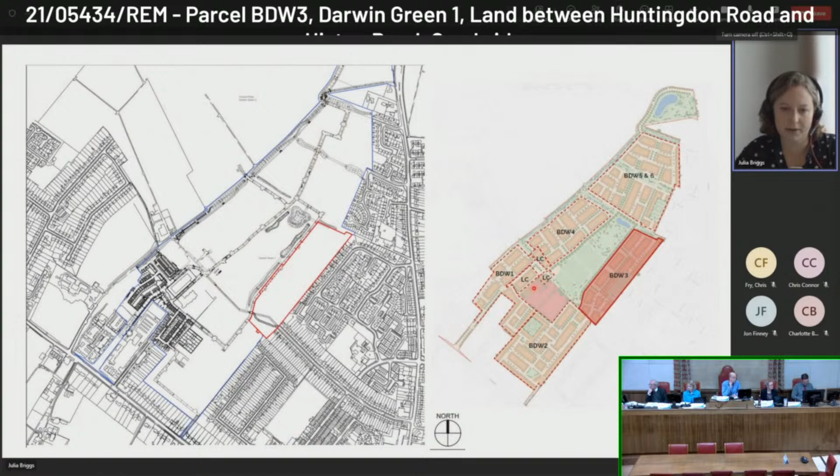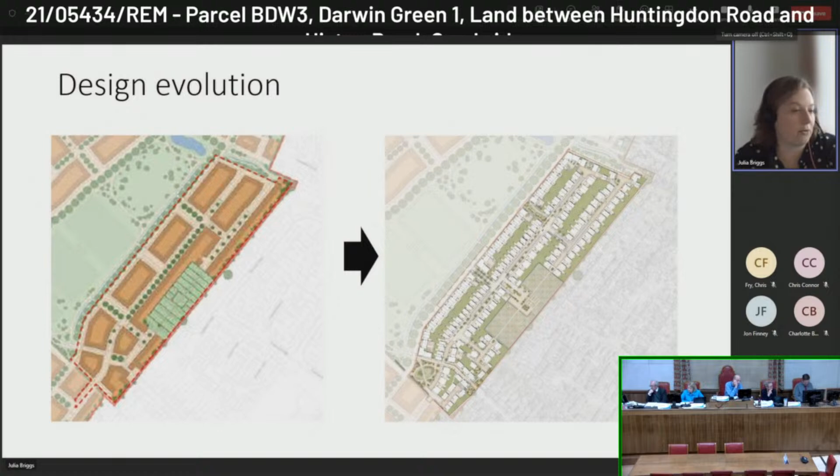This shows the site layout of BDW3, with the Central Park adjacent and existing neighbours also adjacent.

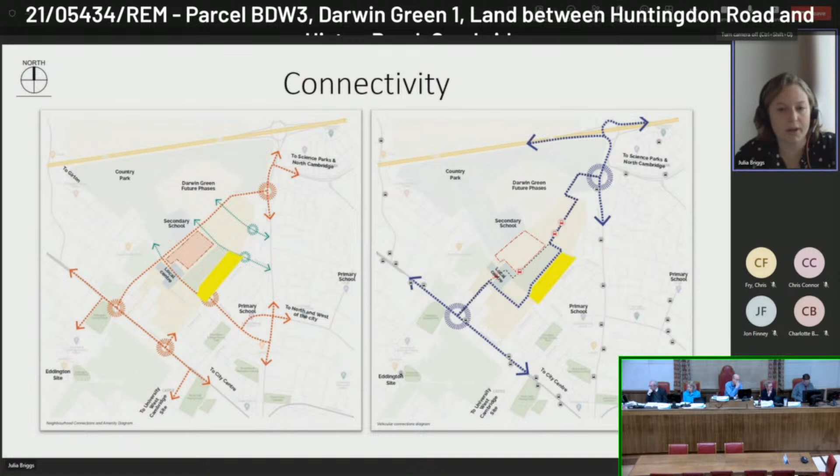Within the parcel, there are two vehicle accesses: one off the primary street, which feeds the majority of the parcel's secondary and tertiary streets, and in the south, one access through the BDW2 site, which feeds dwellings to the south of the orbital cycleway. So there is no through traffic for vehicles in this parcel, other than for emergency vehicles, which is supported.

Looking at pedestrian cycle links, this plan shows a number of pedestrian links throughout the parcel, showing good permeability to adjoining areas, and again access to that orbital cycleway in the south.

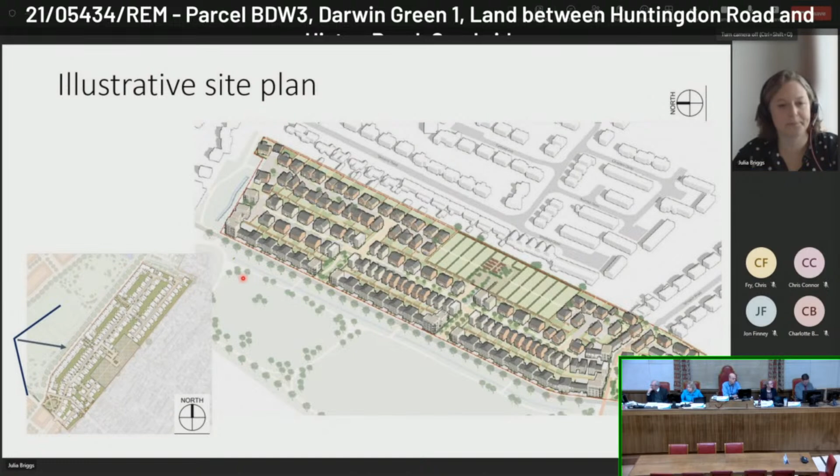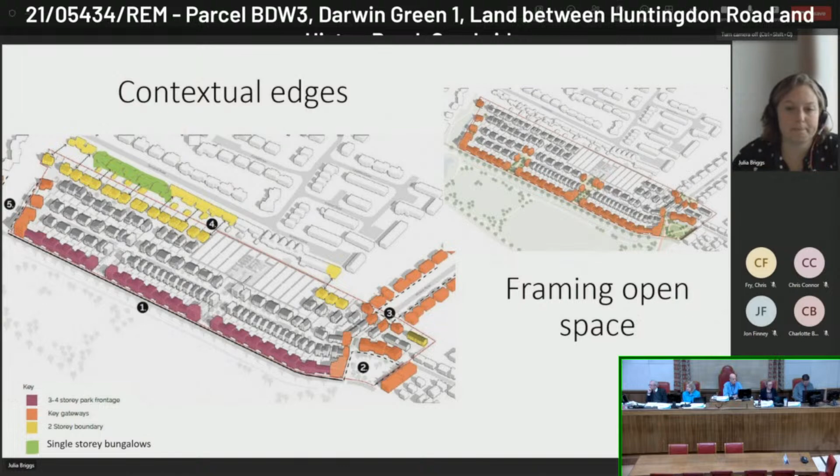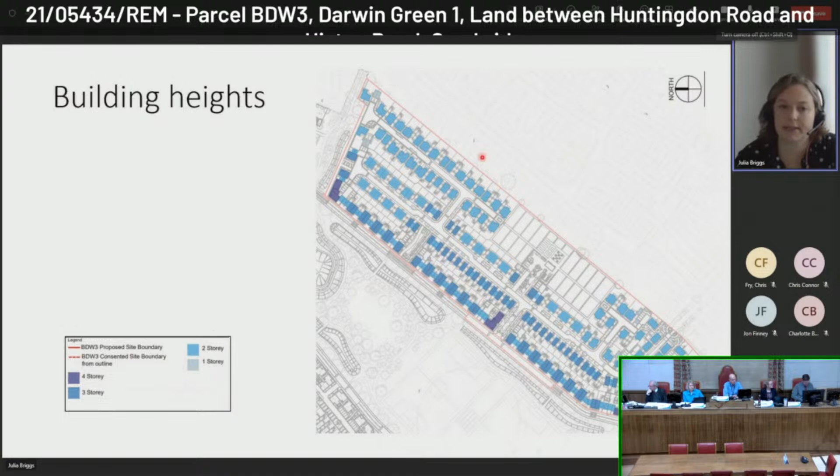The housing mix is shown here with the 3 apartment buildings, where my pointer is now on the corners of the site and on the corner of the vehicle access into the site. There are the walk-up blocks in purple, which also front key entrances on the Green Link and the entrance to the allotments and to Windsor Road. This image also shows the decrease in density of the housing as we move towards the existing neighbourhood.

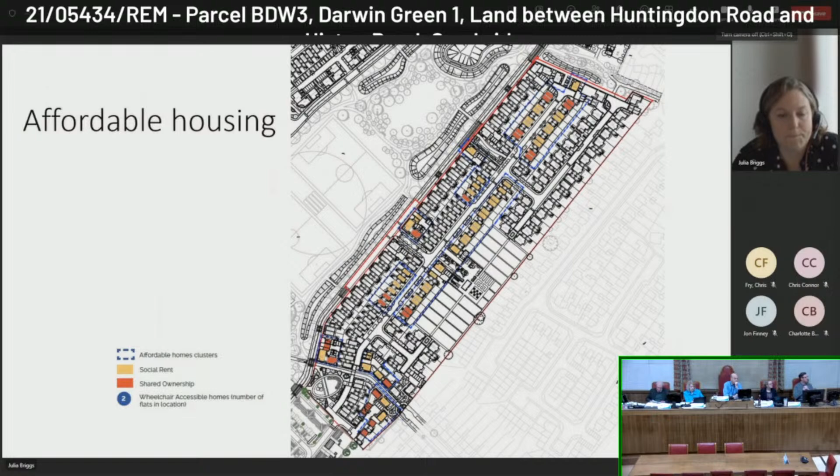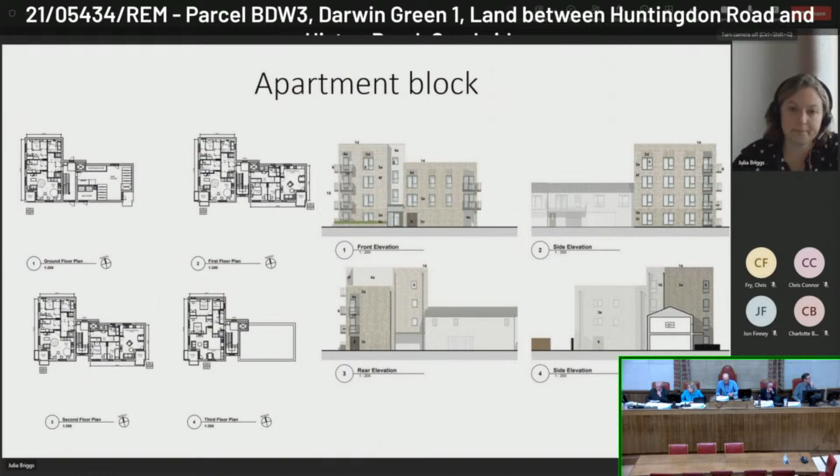So all dwellings in this parcel meet the internal nationally described space standards, including these apartments. This slide shows the park frontage houses, which have 3 and 2 story elements to them. Private external amenity space is provided here through rear gardens and also through front first floor terraces.

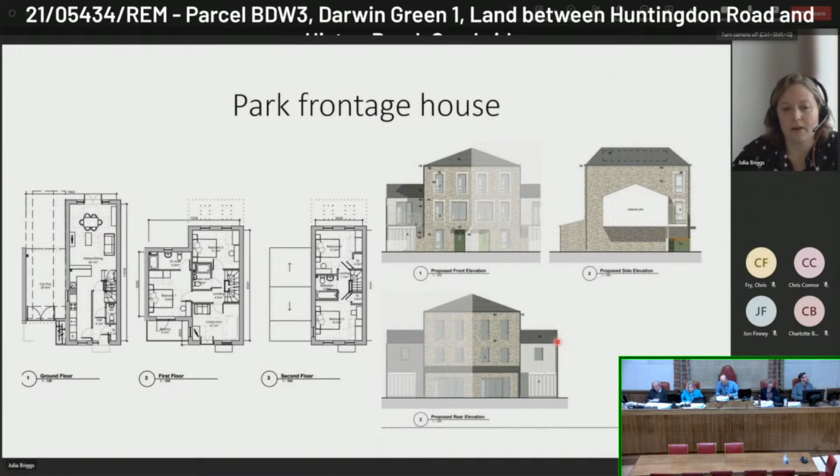There is also a duplex type, which is a 2-story walk-up. Again, each unit has their own access, with 1 unit on the ground floor and 1 unit on the first floor. Private amenity space is provided with patios or balconies, and some also have small gardens. Again, they meet the nationally described space standards.

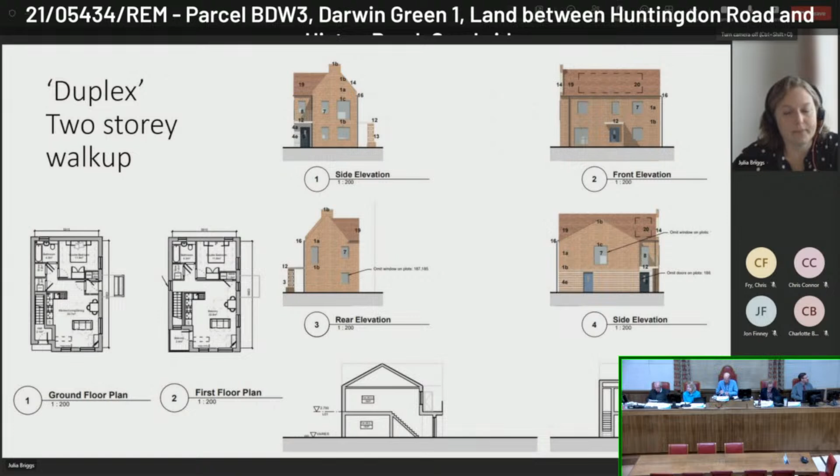Then we have a 4-bedroom detached house, and these units have generous rear gardens. They can be seen along the boundary with existing neighbours.

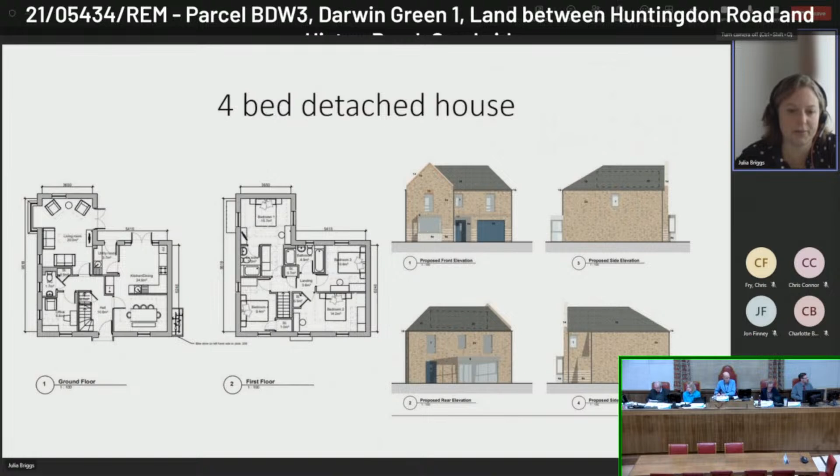There is also a flat over garage typology present on the mews street in the south and next to the apartment buildings on the park frontage. Again, private amenity space is provided by balconies to the front of these units.

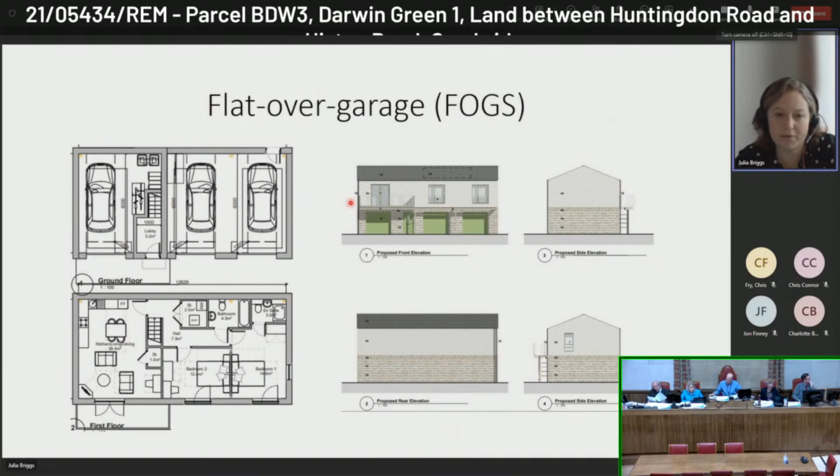Finally, the mews street in the south also contains 3 small 2-bedroom houses, specially designed with lower eaves in this area and private rear gardens, and these meet the space standards as well.

So coming on to some images of the layout and the houses on the scheme. This slide shows the park frontage. The primary street has a formal frontage as required by the design code, with the apartment blocks as marker buildings and with variation provided through the 3 and 2-story elements of those park frontage houses.

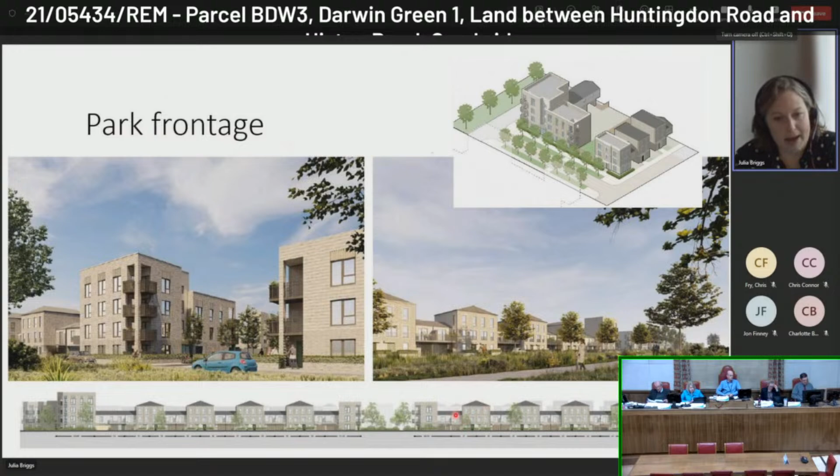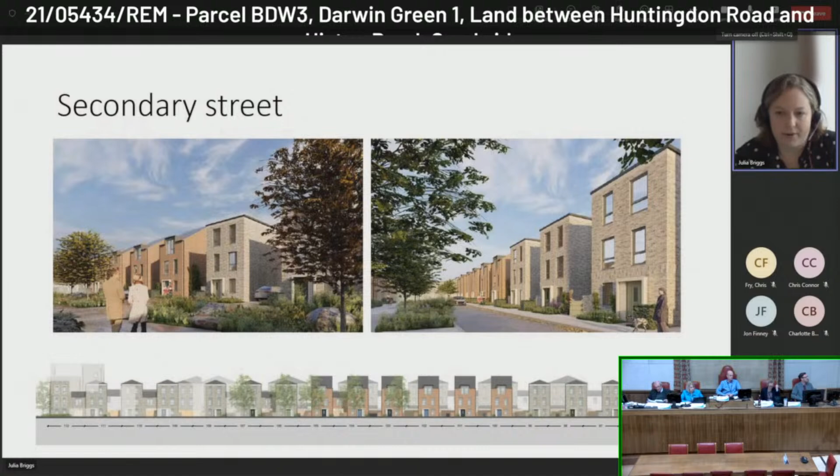The secondary street features detached 3-story housing. Going further through the secondary streets, you see 2-story houses with some 2 and 3-story walk-up blocks as marker buildings in this space.

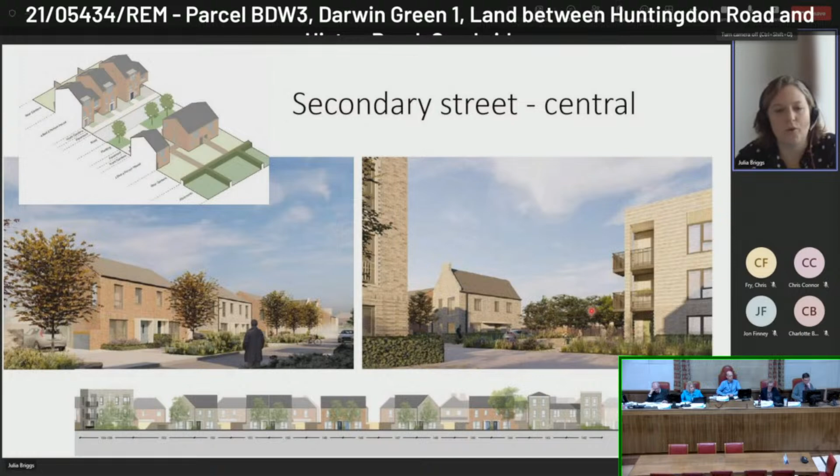On the right, the image here shows the entrance to the allotment parks with these marker buildings on the corner. In the tertiary streets...

there are a number of cul-de-sacs, and these feature detached two-storey houses, and they are shared surfaces and have close layouts, creating a sense of community in these areas.

Finally, this is the Tertiary Mews Street, located in the south of the parcel, and it has the smallest typologies due to its relationship with the neighbouring Windsor Road properties.

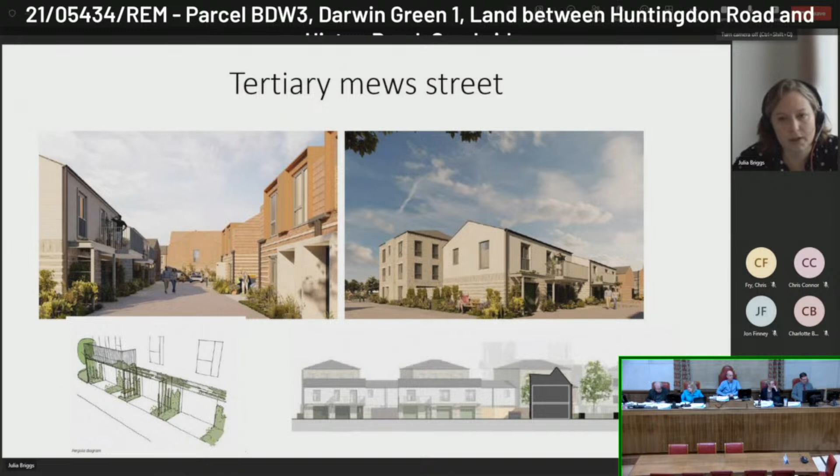So moving on, these site sections just show the gradual decrease in height from west to east, as the parcel in the west fronts the Central Park, and in the east fronts the existing neighbourhood of two-storey dwellings, and then the reverse taken from the northern boundary.

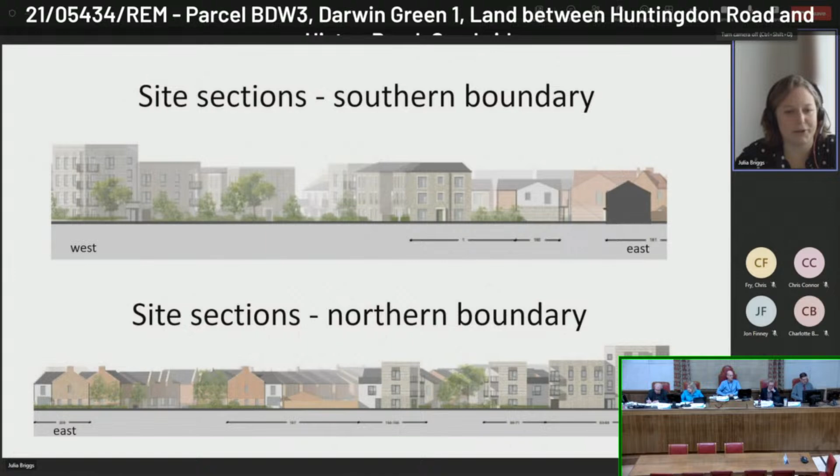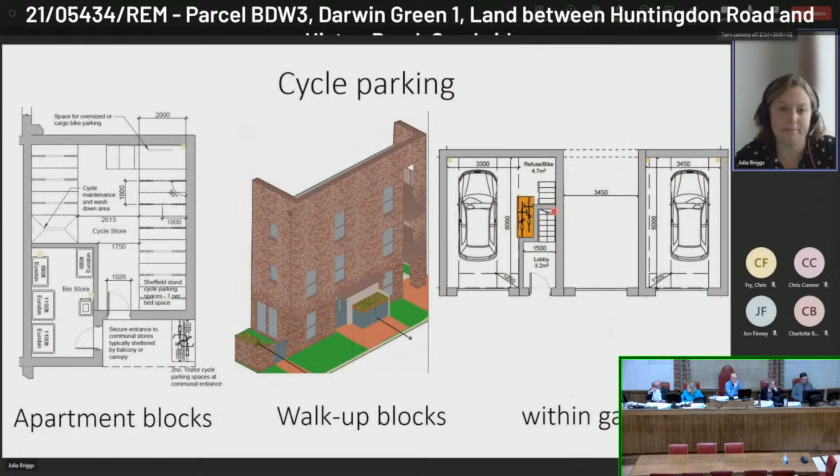Through the course of the application, cycle parking was greatly improved. The approach is the same that was secured on the BDW4 site. So we have apartments providing cycle parking on the ground floor with cargo bike space and also a maintenance area. In the walk-up blocks, cycle parking is provided near front doors, and within garages, cycle parking is provided to the side of car parking and meets the policy dimensions required.

All dwellings are dual aspect. There are lift accesses in all apartment blocks, and 94% of affordable homes meet M42, with the remaining 6% allowing for immediate occupation by a wheelchair user. There is also EV charging secured by condition.

The scheme provides a series of well-located and connected public open spaces. This slide shows where they are located throughout the parcel. So the allotments in the centre, there's a formal park in the south, the Windsor Road Park in the south also, play along the way spaces, an allotment arrival park, a pocket park replacing one of the original master plan vehicle accesses, and then two small parks in the north connecting to the green corridor there.

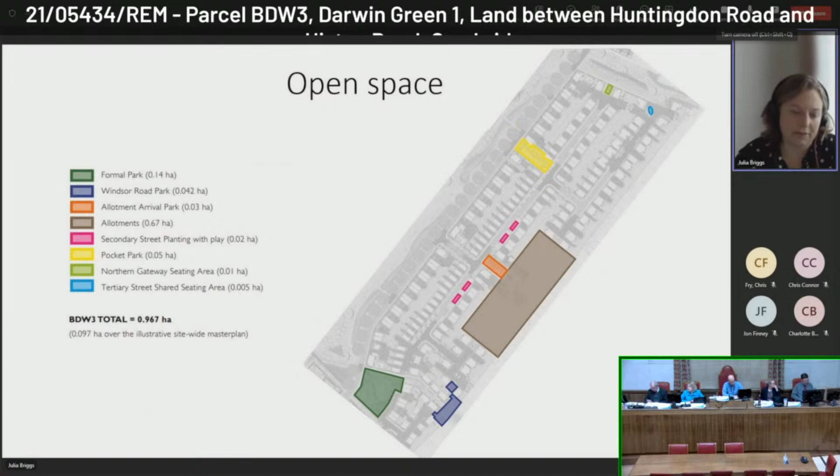In terms of play space, this image on the left shows BDW3 is ideally located adjacent to the Central Park, which provides a number of sport and recreation facilities, including football, cricket pitches, tennis courts, and a sports pavilion, and also a trim trail. There are also additional play spaces to the north and to the south of the parcel as well.

On the image on the right can be seen the 5 laps that have been provided within BDW3. The outline requires 3 laps to be provided and 5 have been provided, showing a good spread of play spaces throughout the site. Details of the play itself will be submitted to discharge outline condition 10.

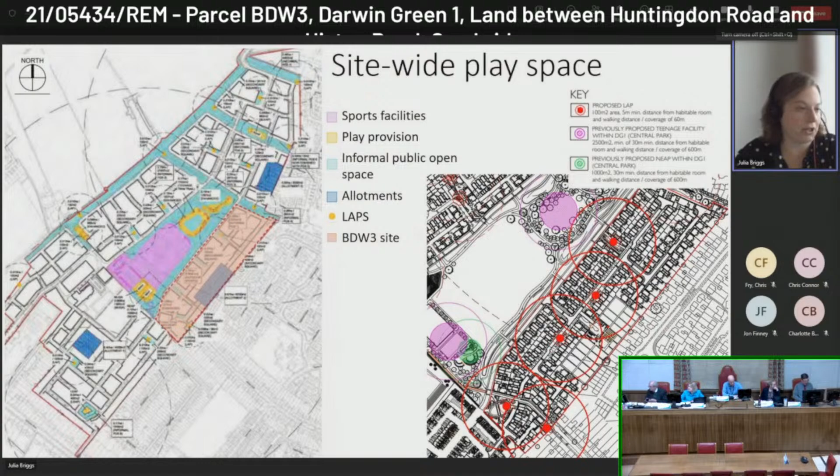Looking at blue and green infrastructure, a number of benefits have been provided here and assessed through green streets, through tree planting, through additional biodiversity features such as bee bricks and log piles and swift boxes, and through permeable paving and rain gardens as well.

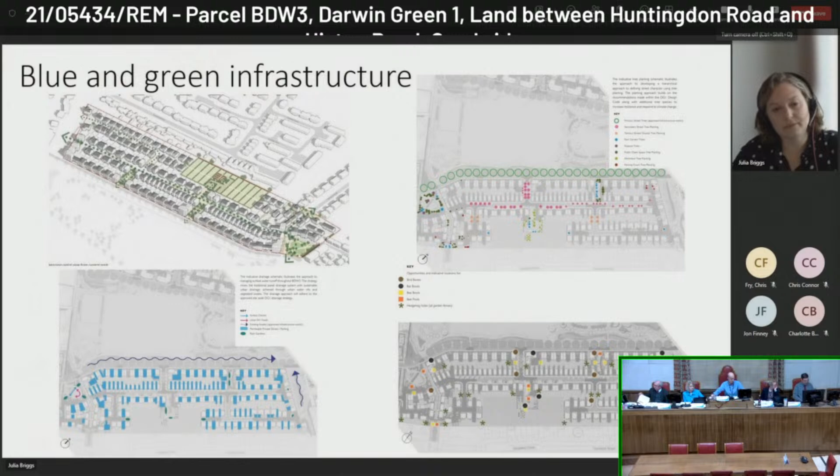This has resulted in a well thought out series of open spaces linked by green streets and with good permeability into surrounding areas. I'm just pointing out the formal park location and the Windsor Road Park location in the south, which I'll come to in some detail in a moment.

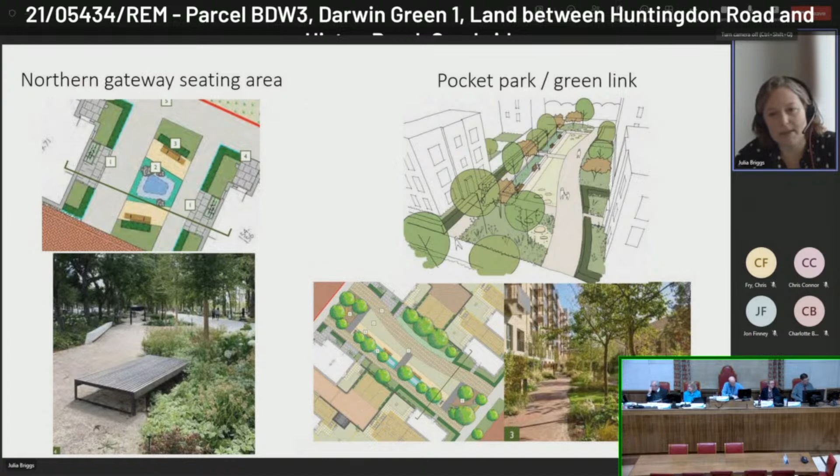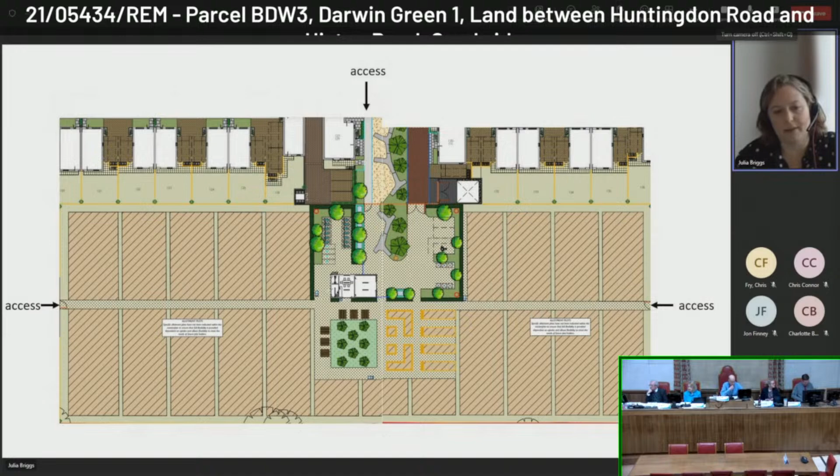As I said, there's two areas in the south, the formal park and Windsor Road Park, that have received some comments that I just want to run through now.

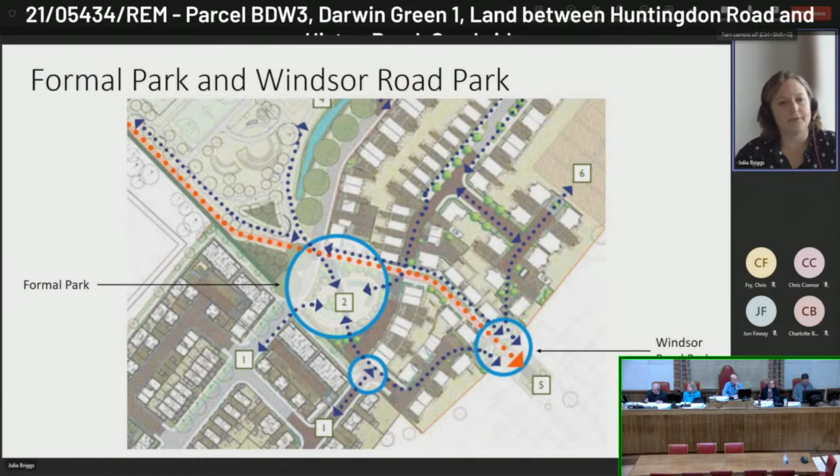Firstly, the formal park in the south, this is located in an ideal area and presents an arrival space at the entrance to the parcel. It's located at a meeting point of multiple paths from different directions. This image here shows some of those directions that people might be coming from, and it also shows the orbital cycle route separate in orange.

So questions have been raised about access into the site and the safety of the lap, which from the plan here you can see faintly outlined here.

Additionally, when the park was designed, there were some elements, the tree here that I'm circling and cycle parking over here, which were provided to act to slow people down through this pathway as well.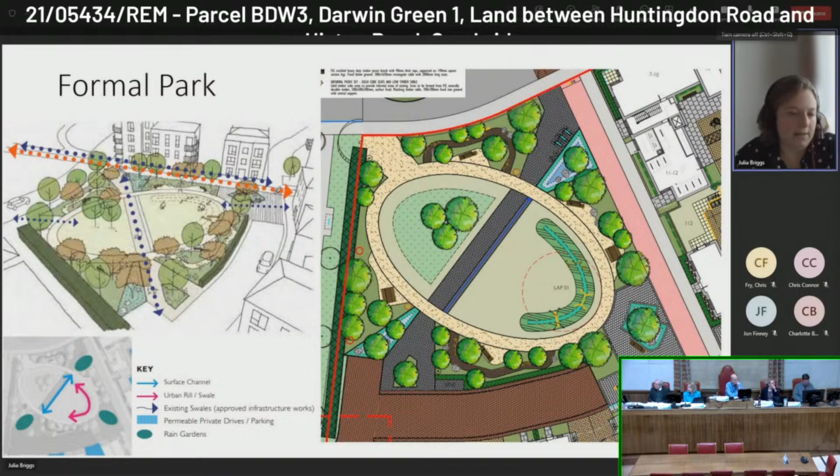So this park is supported. These are some images of what the features of this park may look like, noting particularly the surface channel.

Looking at the Windsor Road Park now, it's located at the entrance to Windsor Road, and it accommodates the orbital cycleway and pedestrian access as well, as you can see in pink and grey here. The design code requires a park in this junction for surveillance of this connection and to create an inviting entrance to the parcel.

This design also provides permeability into side streets, as you can see where my pointer is indicating now, and as this drawing on the left indicates with arrows.

As I said, comments have also been raised about the accesses through to the tertiary streets. These do provide permeability through to BDW2 and also the allotments.

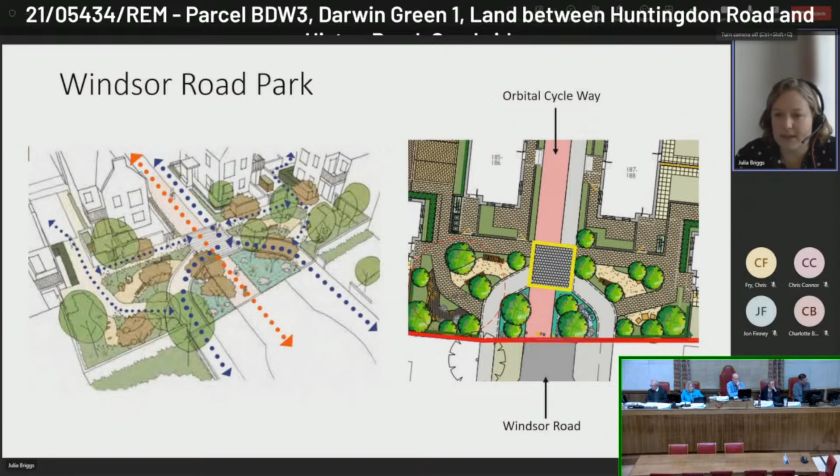Additionally, because the layout in this area is set around the Car-Free Orbital Cycleway to provide surveillance and an active frontage to the cycleway, the dwellings in this area have front elevations facing onto this parkway, and this creates a strong positive frontage to the park and overlooking. The trade-off is that services to these dwellings must be provided to the rear, and this has necessitated links for these residents.

I've added blue and orange arrows showing how residents will be using this area for putting out their bins, and also access to a communal bin store, which can just be seen off to the right here, and also access to their designated car parking spaces. This shows that these areas will receive a fair amount of activity and are required by the layout of this park.

In addition, this is the landscape or ground floor plan of the area, and these pink arrows indicate windows and doors that face onto these areas, providing good natural surveillance to them as well.

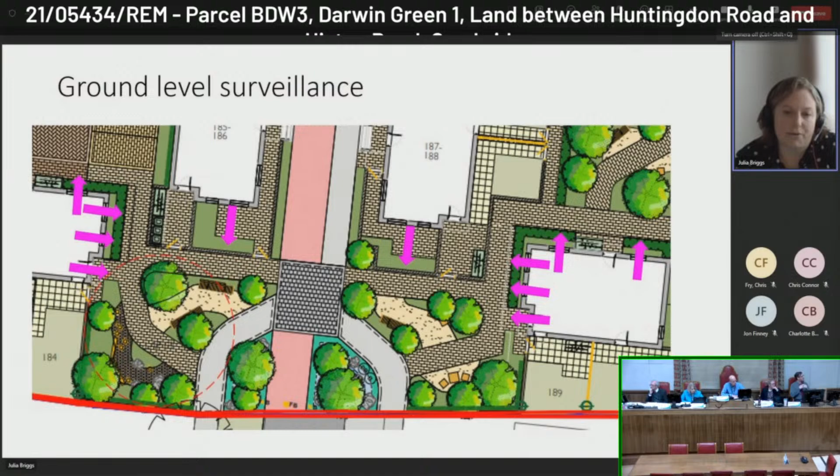I've included one further plan of the first floor layout, and this shows in pink a number of windows facing onto these areas, and also in blue arrows the balconies which overlook these areas as well.

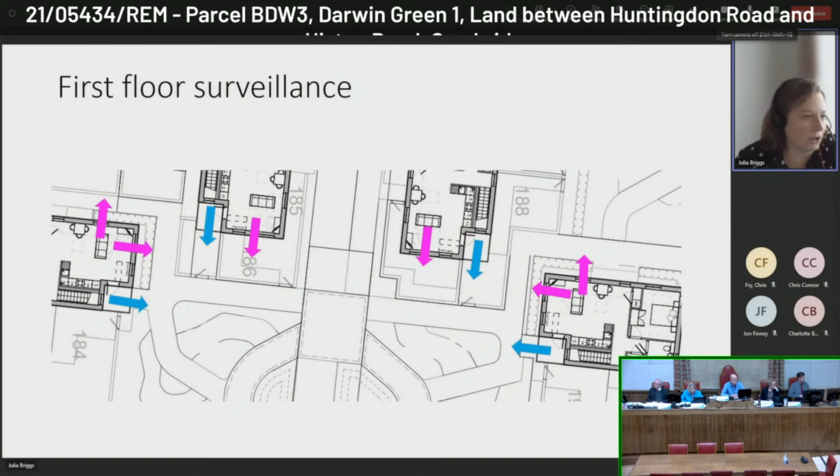Just finally, an image of what the park would look like, a CGI image, and it shows a good level of surveillance from the surrounding properties and quite an open park. For these reasons, the park design is supported.

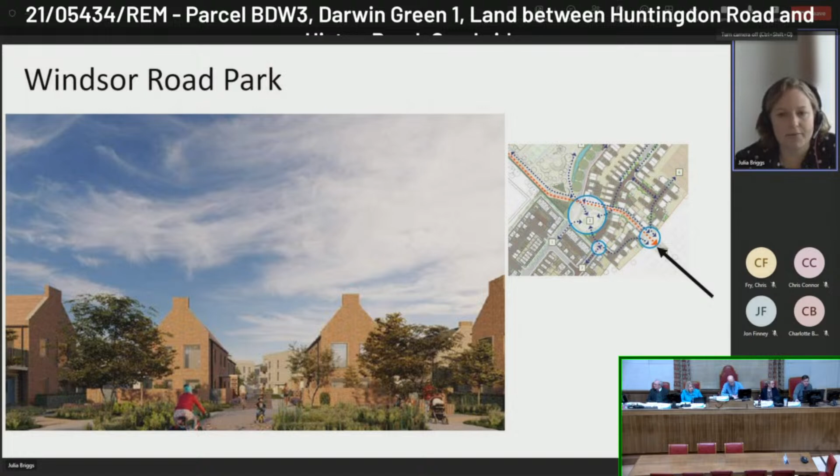There have also been objections raised regarding securing the orbital cycleway to prevent future vehicle access through to Windsor Road, which is required by the design code.

So the layout has ensured a 4.8 metre cycle and pedestrian way in this location, and condition 27 on the amendment sheet is recommended to retain the 4.8 metre cycle and pedestrian route, and also the private frontages of these plots here to protect against future vehicle access.

Turning to refuse, much of the parcel has street front refuse collection, and amendments were made throughout the application process to bring drag distances within the recap guidance.

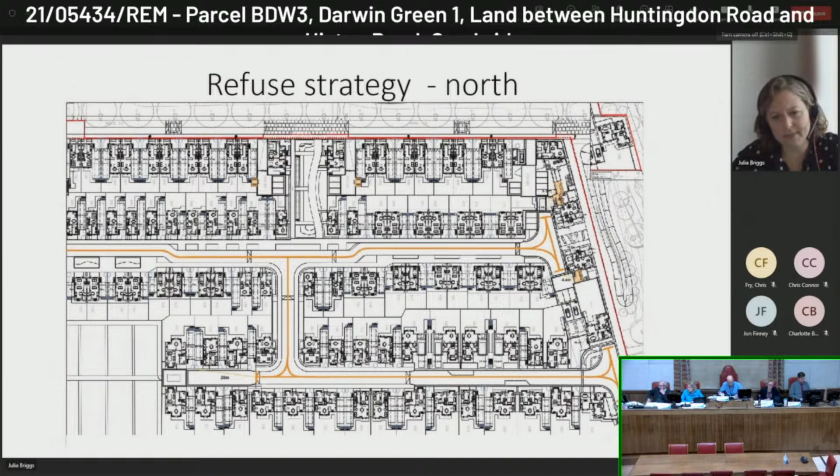So this is the refuse strategy in the north and in the south. In the south of the site, there are some areas of non-compliance, which occurs mainly around this orbital cycle route, which is car-free, as I said. So there are wider placemaking benefits achieved in having this car-free space.

Again, this requires services to be to the rear, and there you can see in orange the refuse vehicle tracking, and this only allows vehicles to get so close to this area, and this has necessitated some longer drag distances in this area. On balance, it's considered acceptable in this instance.

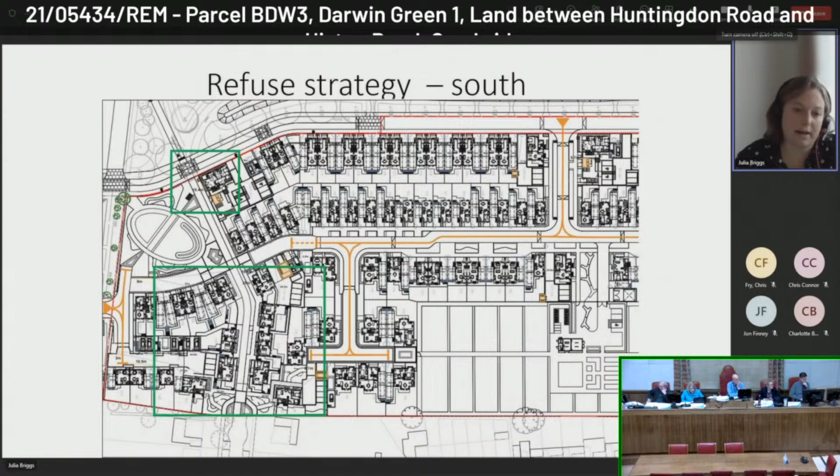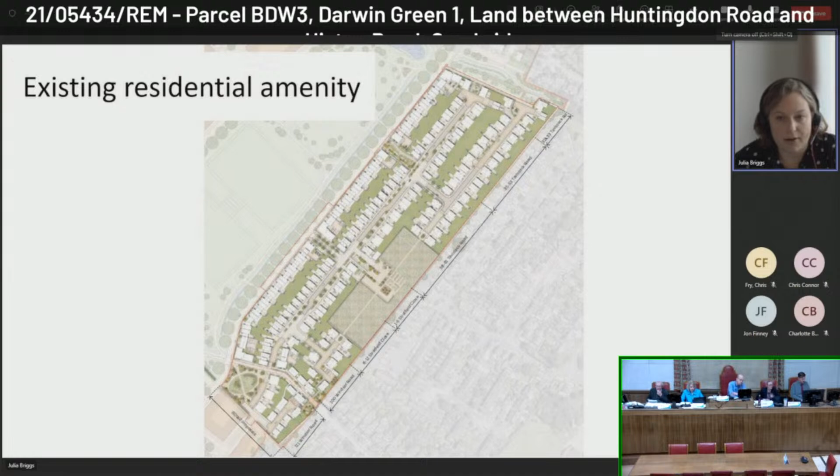Finally, just looking at the existing neighbours to the site along the eastern boundary and a little bit in the south and north. The layout has been carefully assessed in terms of residential amenity of these neighbours. In the northeast of the site, the proposal is not considered to substantially impact on neighbours.

This diagram here shows the distances to Caverson Court residents and residents at the top of Tavistock Road, and there's a minimum of 29 metres separation between properties in this location, and there is also going to be a green area planted out that was approved through the infrastructure reserved matters that will contain trees in this area, providing a buffer to this property.

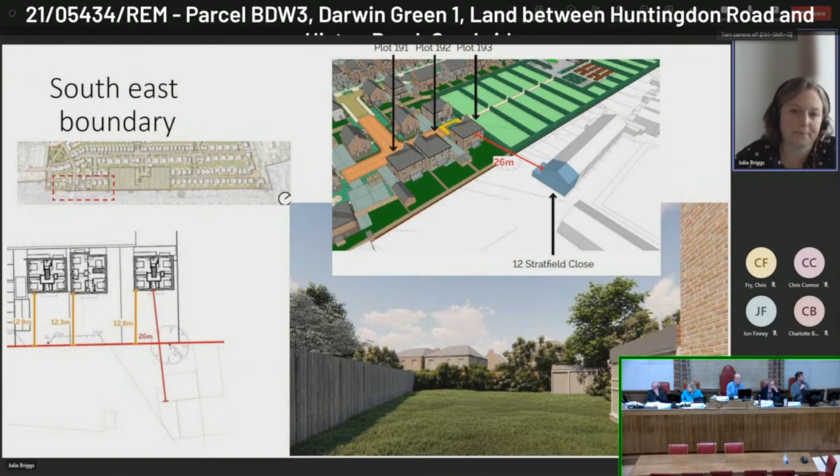Moving further south, the scheme proposes dwellings with rear elevations facing at 90 degrees to two properties at the end of Windsor Road, numbers 100 and 111. For number 100, the separation distances shown here are at least 12 metres, and the area immediately to the rear of number 100 Windsor Road will be a landscaped area with parking beyond. For these reasons there is no unacceptable impact on this property.

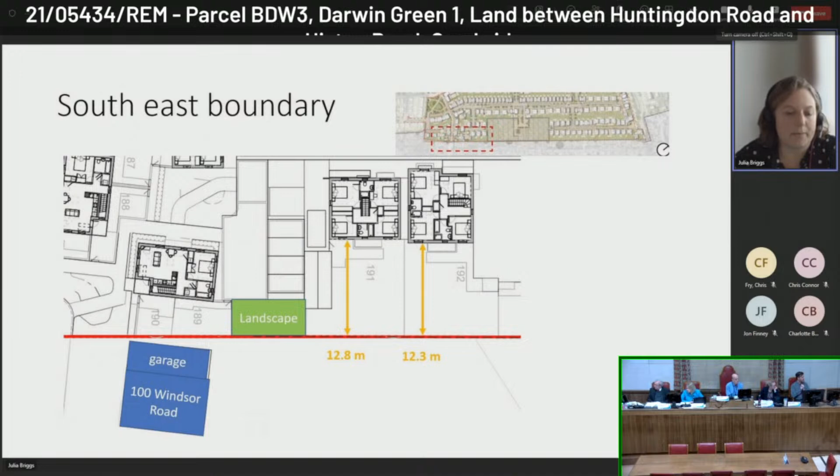Finally, for number 111 Windsor Road, comments have been received on the initial proposal about impacts on this property, and throughout the application process the applicant has undertaken consultation. Amendments were created to form gaps through the built form in this area, and a lowering of the eaves and roof tiles down onto the elevations of these blocks to reduce the presence of these buildings. Windows from the first floor have also been removed from these elevations to protect privacy, and these adequately respect the amenity of 111 Windsor Road.

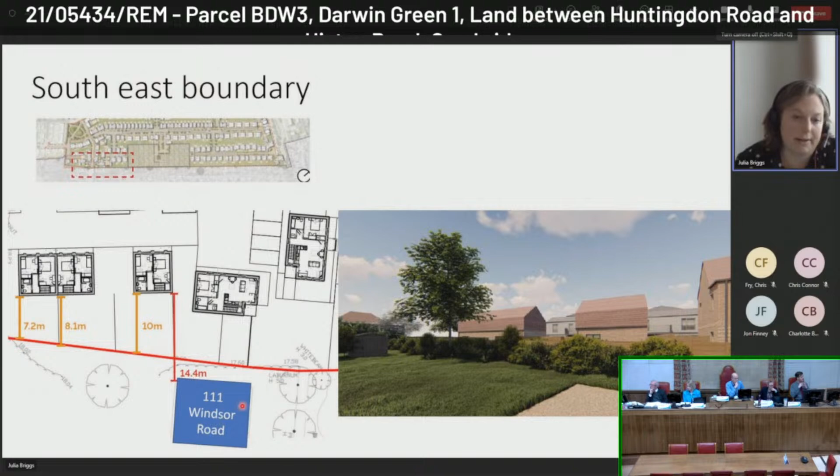So the scheme has positively evolved through the pre-application and application processes. The proposed layout provides a parcel with reduced vehicle dominance and greater permeability for pedestrians and cyclists. The orbital cycleway has been provided with a car-free route, which is a welcomed improvement. More open space of higher quality has been provided. Homes are more sustainable and accessible than the outline requirements, and all provide private external amenity space, meet internal space standards, and provide convenient cycle parking. The amended proposal has also made improvements to the impact on existing neighbours, and these are acceptable. Concerns regarding the functionality and safety of the orbital cycleway and Windsor Road Park have also been addressed through amendments. These benefits are balanced against the removal of one tree in the north and some non-compliance with the recap waste guidance, and for these reasons the scheme is supported.

Just before I turn to the recommendation, I wanted to include a slide on the amendments on the amendment sheet for this application, noting some revised plans. An additional condition 27 to secure the orbital cycleway, with a width of 4.8 metres, and some minor amendments to conditions 9, 23 and 26, and a correction on number 6 of a cycle parking plan that had an old version in it. So those are the amendments.

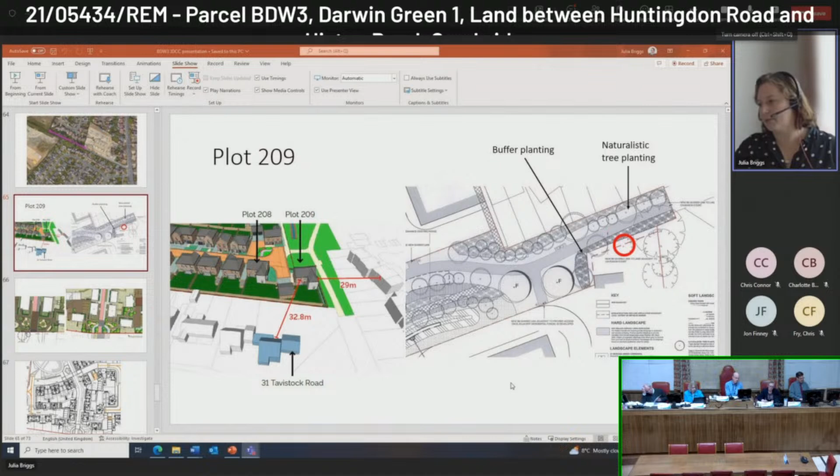This plan to the right shows the approved infrastructure permission, which has a planting green corridor area proposed between plot 209 and the houses at Tavistock Road. So this shows that trees and shrub planting will be a feature of this area, providing a buffer between Tavistock Road here and plot 209 in the south. The red circle indicates the one tree sought to be removed from the plot. In the officer report, it discusses the balance of removing that tree versus the benefits of the other trees planted throughout BDW, including in this infrastructure reserve matters for the green corridor.

There's two more questions, just a moment.

The third question relates to letterboxes. Can we have a condition that these must be accessible for flatted blocks and not behind outer doors? In response, this only affects the apartment blocks, three apartment blocks, as all other walk-ups have individual doors with letterboxes available. The approach throughout the Darwin Green parcels has been for letterboxes to be accessible at the front of apartment buildings and designed to secure by design standards.

In addition, there is an informative regarding letterboxes, and that informative could be made to include this detail.

Question four: non-adopted areas. Is there something in the management plan to ensure fair charges for maintenance of these areas outside city or council control? In response, the Section 106 requires service charges for affordable homes to be agreed with the council.

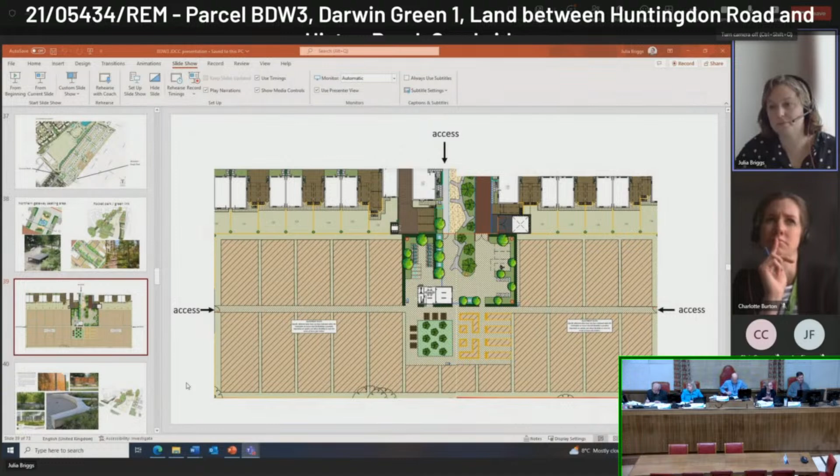Second question regarding removal of permitted development for roofs and for balconies. I may need to just... oh, Charlotte is going to help with that one.

My suggestion, and Keith might want to come into this, is that any extension on a first floor terrace or a balcony would count as a 2-storey extension. And Julia's already recommended condition 20, which is the removal of permitted development rights for 2-storey extensions. So I believe that would be covered, but Keith might want to just confirm that for us. I'd confirm that is the situation, or would be.

The Southwest Corner Formal Park was very much in line with my question, so I think we can deal with that in the debate. And then on the amended condition, I can't remember the number now, this is about no more than 4.8 metres. I don't see a problem with that. Okay, so, yeah, no, I agree with that also. That's condition 27, thank you for that.

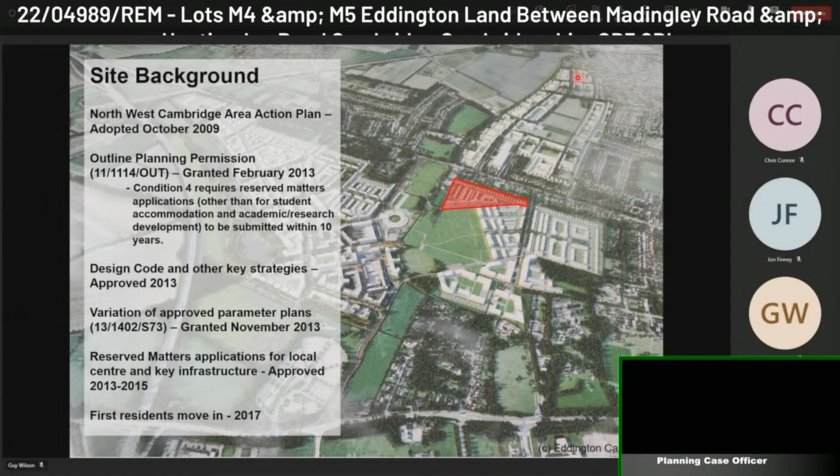So this just shows the red line site location plan. Apologies, it's a bit of a fake sort of outline. So it's on the eastern side of Eddington. It borders properties on Huntingdon Road to the north, and there's some commercial development to the north and northwest. Within the site, there's a number of redundant buildings, and the site also includes the secondary street, which will connect into Eddington Avenue to the west.

So just to give it a bit more context, this again shows the site outlined in red. You have Huntingdon Road to the northeast, with Darwin Green beyond that. There's an avenue of horse chestnut trees to the east of the site, and then Storey's Field, which is an area of open space to the south of the site. Then to the west, you have the existing phase 1 development within Eddington, including the primary school, Storeys Field Centre, and sports pitches. You can see here as well where the site will be accessed from Eddington Avenue.

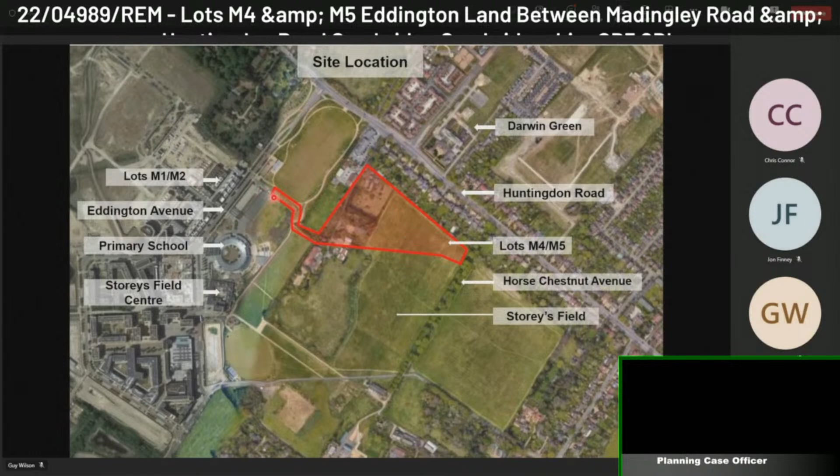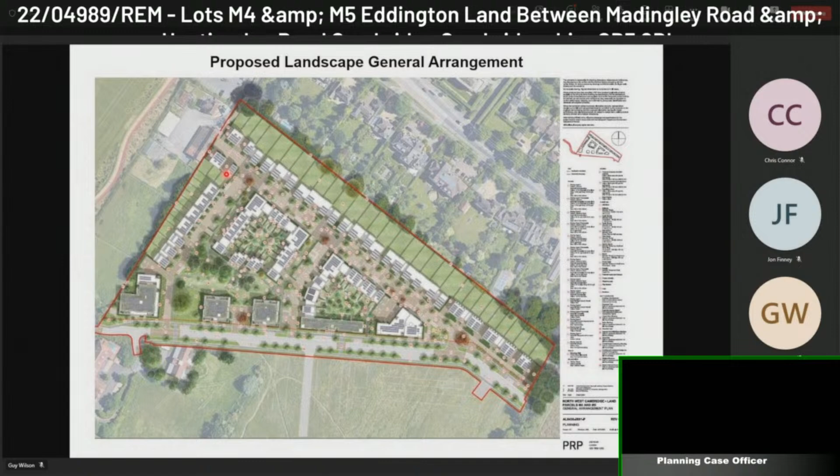linked detached, semi-detached and terrace houses between 2 and 3 stories high. So in relation to story heights, this plan shows the proposed story heights. You can see the 4-story prevailing blocks fronting the Storeys Field, and then again the 4th-story element to the eastern courtyard block here as well, and then we can see the courtyards again at 2 to 3 story, and then development houses along the development edge again a mix of 2 and 3 story.

So in terms of building heights and story heights, there's two elements of guidance within the outline permission. There's the parameter plans, which set out fixed maximum heights for buildings, and the proposal is fully compliant with the parameter plans. The design code also includes guidance on story heights.

You can see that the colours on this bottom left here match the plan on the right, so you can see that blocks A, B, and C are compliant with the maximum story height guidance, and then there's a couple of areas of non-compliance. So block E, which is in the bottom right corner, slightly exceeds the story guidance within the design code, which is for 2 to 3 stories generally, and then along the development edge, the design code advises 2 stories generally, but as you can see, it's a mix of 2 and 3 story.

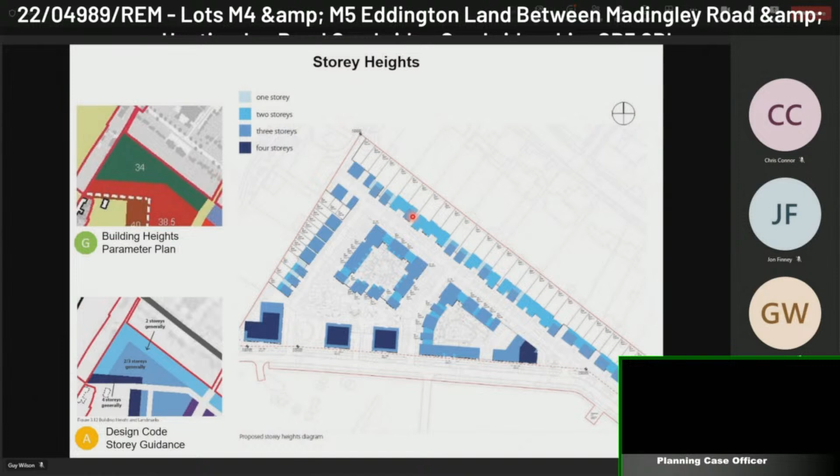So to move on to the elevations and design of the blocks, this shows the elevations of block A. There are 2 or 3 key design elements used across this block and across the site. There's what the applicant describes as a rigid grid detail, which is where the cursor is on the screen here, where you have this quite regular grid style, and there's a more informal grid with more asymmetric elements, which you can see where the cursor is now, and then setback elements typically in a darker brick. Those elements are used across the site to break up the massing and to activate the elevations of the buildings.

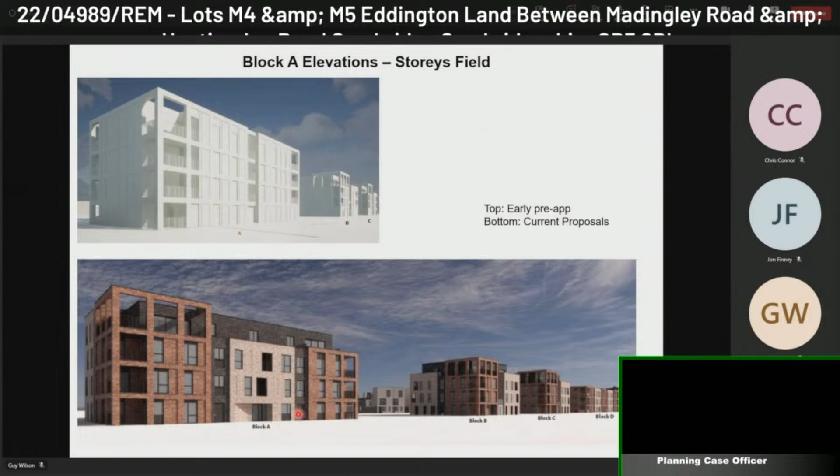Now to move on to the housing. This is a typical example of the courtyard housing, which again uses primarily that asymmetric grid with things such as setback balconies. You can also see the link elements, which are again set back to reduce the scale and massing of the buildings.

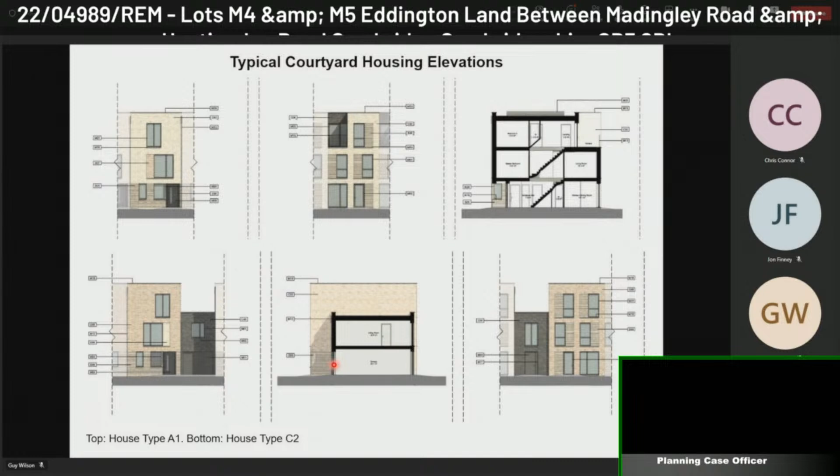Bringing that together, this shows some site sections. This is looking along the loop road within the site, so looking at block A, then moving north towards the northern corner, and the middle and bottom sections here show the elevations along the northeast side of the site. Those are the houses which back onto Huntingdon Road. You can see that use of linked attached, semi-detached, and terraced houses. Generally the terraces are 2-story, and then you have the taller elements, so either linked attached or semi-detached here.

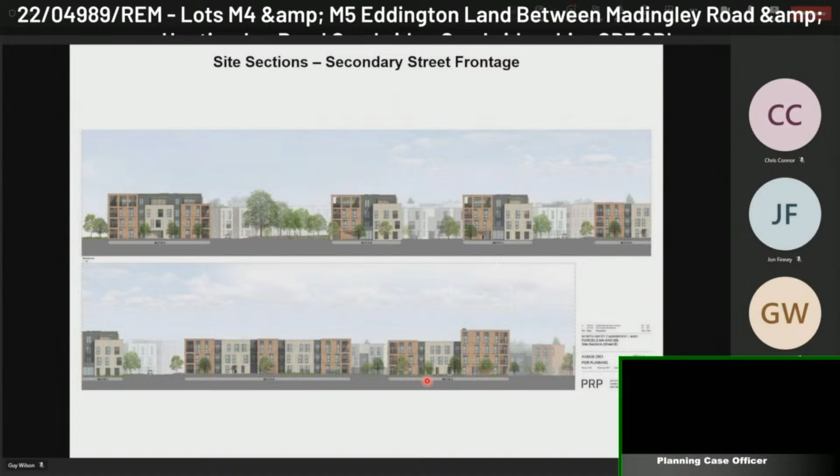Then just quickly some site sections. These are sections through the site, showing houses on Huntingdon Road on the left-hand side, and then the proposed houses, and also Block E on the right-hand side, to give you an idea of the relationship there.

One of the elements of the design code is that there should be a 20-metre buffer between development and the boundary with neighbouring residences. So that's shown here, you see this 20-metre garden. Existing properties along Huntingdon Road typically have gardens of around 40 metres or more. And you can see that shows the relative heights and relationship between those proposed dwellings and the existing ones on Huntingdon Road.

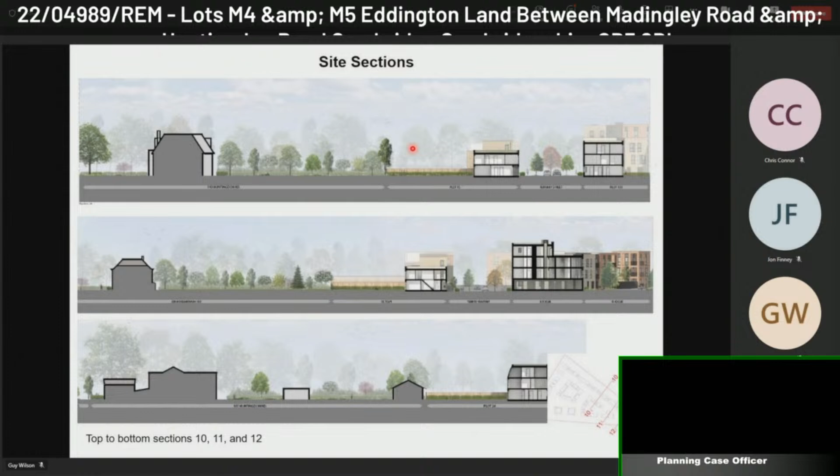Just quickly touching on the architectural design and use of brickwork. Within Eddington at the moment, the predominance of brickwork and design is using quite light buff brick and precast concrete elements. So this proposal looks to introduce some greater variation to reflect the slightly more suburban nature of this part of the site. There's an orange-red brick proposed, a lighter buff, a more orangey buff brick, and also a dark grey-brown brick, which is primarily for those setback elements. That's proposed to be mixed in along the site to provide variation throughout the site.

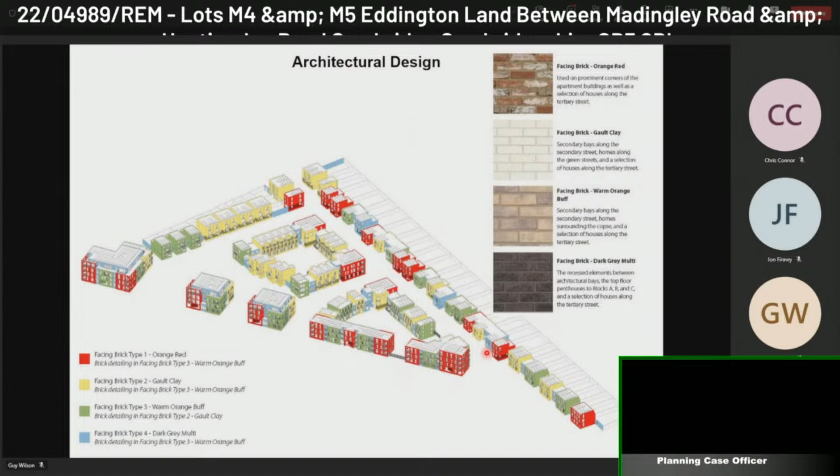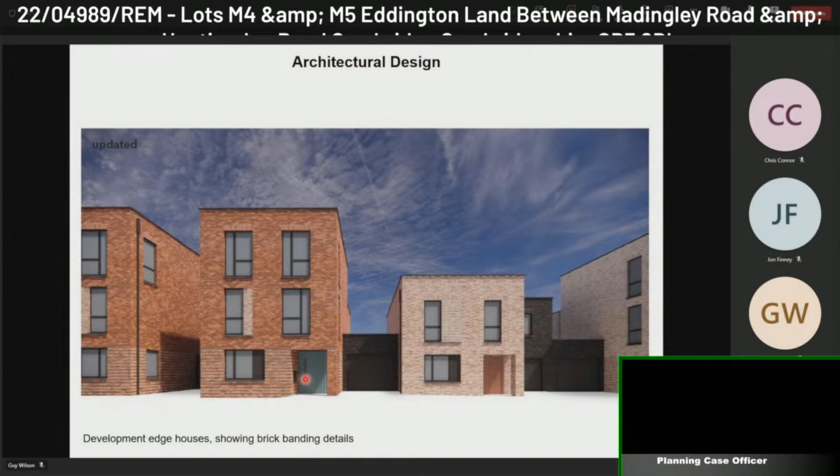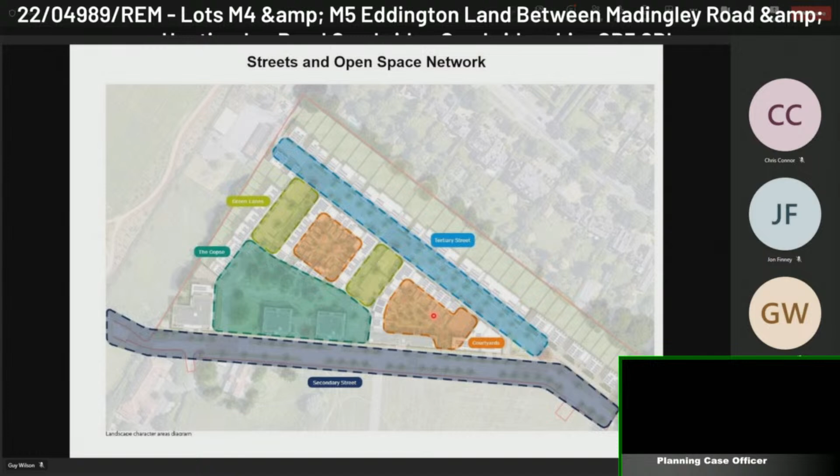Looking at how the movement network works, the primary vehicle access to the site is through the secondary street, and vehicles will be able to use the loop road. There's also this central access which won't have through access for motor vehicles - it will only be bollarded at the centre, so only cyclists and pedestrians will be able to go through that. There are also segregated pedestrian routes through the site, including through the Copse and along the key streets.

There's also pedestrian and cyclist access proposed to Huntingdon Road from the north. There's an existing driveway access to the existing buildings on the site, and that's proposed to be retained as a pedestrian cyclist only link. There will also be a link through to the Horse Chestnut Avenue on the eastern side of the site.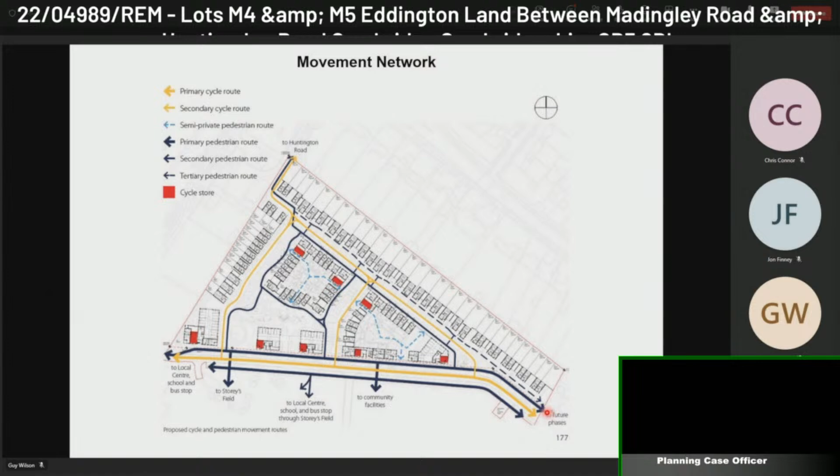The connection through to the west runs through the Greenbelt open space, and it has quite a simple design, with a pinch point worth noting here, due to the fact that the university's land ownership at this point is quite narrow. So the roadway is pinched in to a single lane carriageway with a separate pedestrian path and waiting areas for vehicles. This is seen as a positive in some ways, as it helps slow vehicles down and maintain a low speed environment. A pedestrian priority crossing is also proposed where there's an existing footpath which crosses the site.

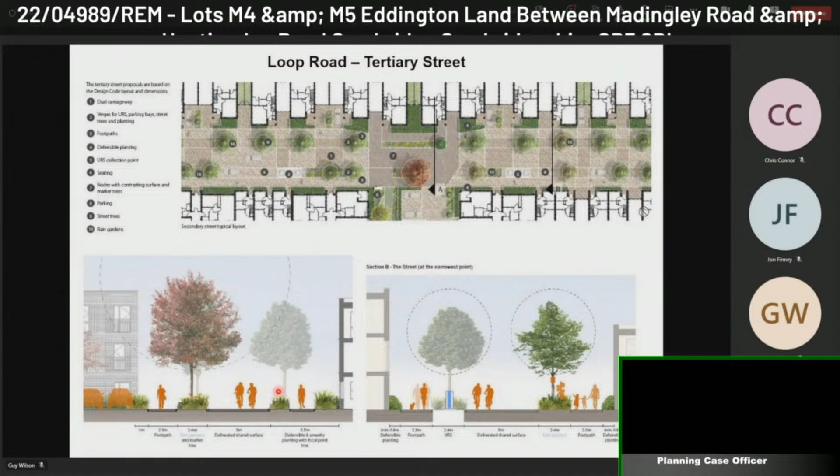So this is one of the green streets. This has been developed as a way to integrate street level parking into the site so it won't be a dominant feature. These are quite wide corridors, typically 22 metres or more, with a 6 metre carriageway and perpendicular parking interspaced with planting areas for trees. It's got the advantage that they're located centrally, so there's lots of space for them to grow, and large tree species can be accommodated. Then you've got a wide landscape strip including a pedestrian footpath and features such as swales and planting.

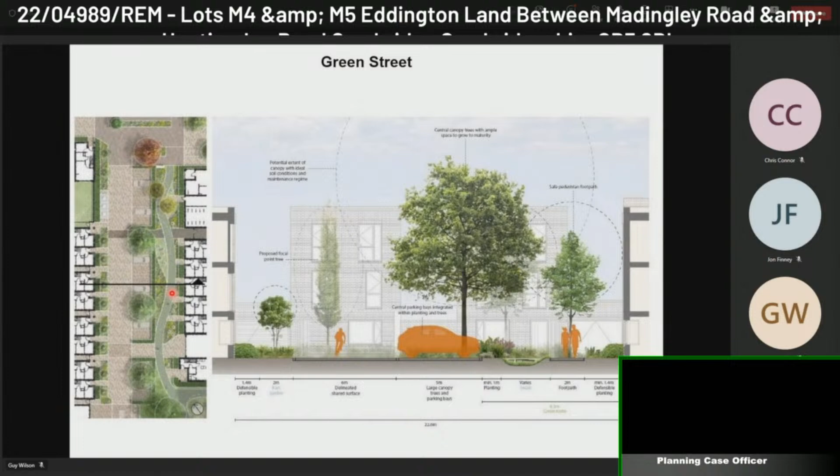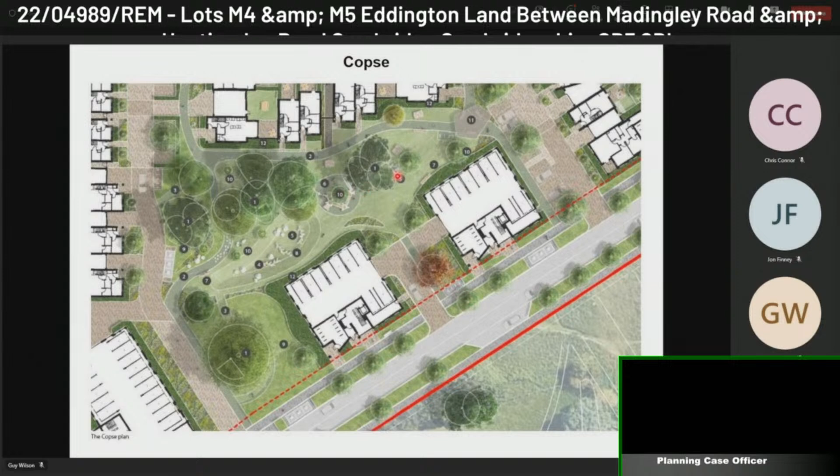Just moving on to the copse area. The copse wasn't intended to be retained as part of the outline master plan, but it's something which the applicant has worked with us to look to retain. What's proposed is to retain a number of trees where they're in good condition and have a healthy lifespan still, and to integrate that into an area of open space which will bleed into the Storey's Field to the south. The space is also proposed to include other features, including an attenuation basin, a play area, seating and a meeting point, as well as pedestrian footpaths.

Just moving on to youth and play facilities. One thing that's changed slightly from the original master plan is that the play area, proposed next to Block E at the junction of the loop road and the secondary street, has been moved towards the copse area, as that would be a less trafficked and quieter area - a design change which officers are supportive of. There'll be a formal play area shown in yellow here, as well as informal play areas including logs and boulders and so on, located around the attenuation basin and other parts of the copse, as well as a space of seating and this pergola feature which provides shelter on the eastern end of the copse.

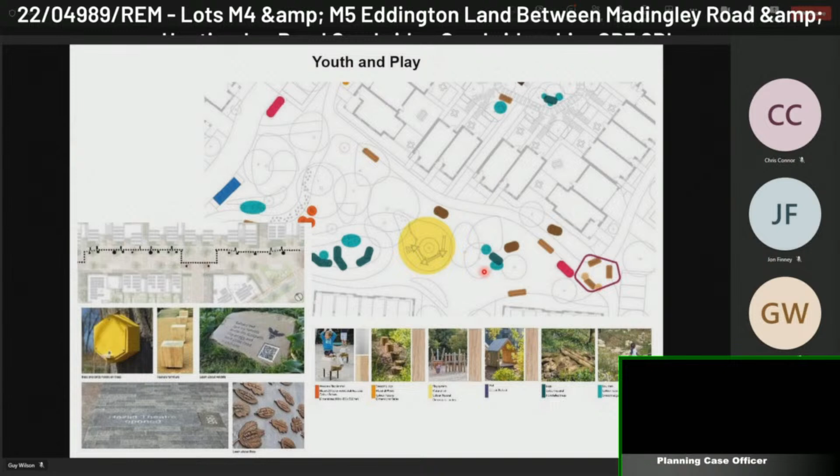In terms of cycle parking, for the houses along the development edge, cycle parking is proposed to be accommodated in garages or cycle stores, with the garages sized to be able to accommodate bicycles. For the apartment blocks and the courtyards, cycle parking is proposed to be within shared cycle stores. These have been designed to include Sheffield stands, and one amendment made through the application has been looking to incorporate space for larger cycles and cargo bikes. That's proposed to be included in the courtyard blocks, with the thinking being that as these contain larger units including three-bedroom houses, there's likely to be more demand for cargo bikes in this part of the site - that's one of the amendments made through the application.

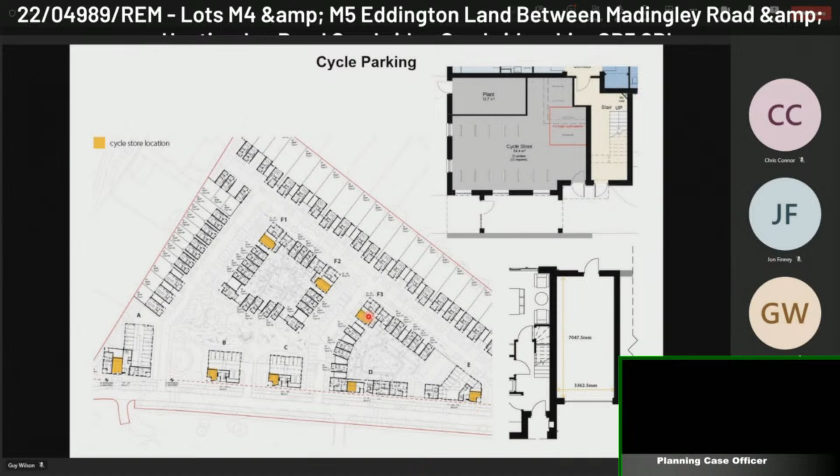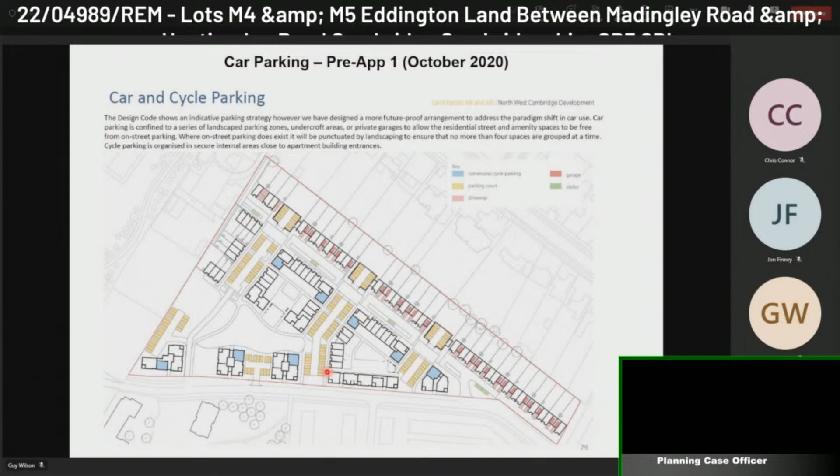And then moving into car parking. This is something which has changed quite substantially since the early pre-app. Initially extensive on-street parking was proposed, but that's evolved substantially to what we have today, which is a mix of parking within garages, shown in green, primarily along the development edge, undercroft parking in blocks A, B, C and E, and also limited on-street parking, primarily on those green streets shown earlier in the presentation. Where undercroft parking is proposed within these apartment blocks, it's generally to the sides and rear, with active frontages maintained, with some units at ground floor and also cycle stores and entrance lobbies fronting onto the Storey's Field, so those frontages remain active.

In relation to servicing, as with the rest of Eddington, underground bin stores are proposed. The vast majority of houses have a bin store within 30 or 50 metres. There are, I believe, 2 houses which are slightly further, around a 70-metre walking distance to the bin store for these houses.

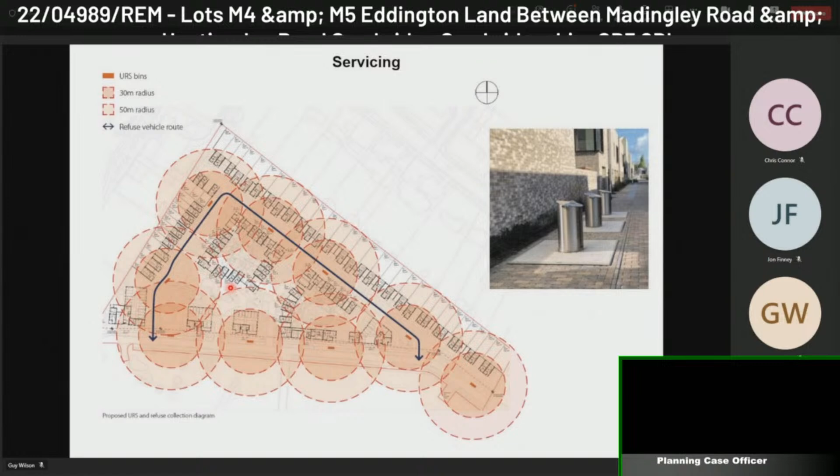In relation to sustainable design, the Outline Permission requires houses to be built to Code for Sustainable Homes Level 5. Although it's now being withdrawn, it exceeds the requirements of Building Regulations Part L, with a 100% reduction in target emissions against the baseline.

It also includes a requirement to target 80 litres of water use per person per day. The site will also be connected to the non-potable water system and the district heating system for the site, and extensive areas of solar photovoltaics are also proposed on the roofs of the buildings.

One area we've spent some time carefully considering is overheating and daylighting. We've looked to eliminate single aspect apartments as far as possible - there are I think 14 proposed across the site. The applicant has undertaken overheating analysis.

For all the houses, they've used the simple methodology under Building Regulations Part O, and all units pass that. They've also done an analysis of the apartments using dynamic thermal modelling, including a sample of the apartments with higher sun exposure, and all units again pass the assessment criteria there. Passive cooling measures are proposed, including low G-value glazing to solar exposed facades, and also use of recessed balconies.

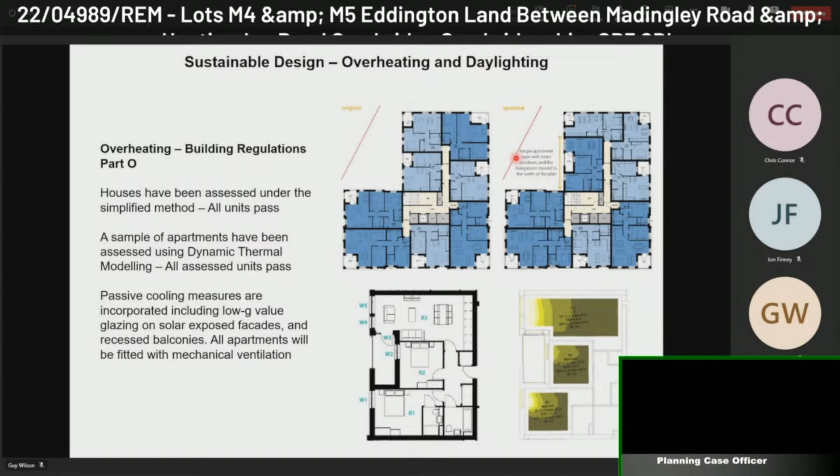In relation to accessible design, the outline permission requires that at least 50% of dwellings are built to lifetime home standard. All dwellings across the site are proposed to be built to lifetime home standard, and in addition, almost all are proposed to be built to Building Regulations M4(2).

The exception to that is within blocks F1, 2, and 3 - you can see on this image, circled in red. The reason is that these blocks only have a small number of units, 5 units above ground floor, and the applicant has concerns that installing a lift would add significantly to both the build cost and the service charge for these units. So lifts have been omitted for these blocks, while all other blocks have lift access and are fully compliant with M4(2). Given that the site is going beyond the requirements of the outline permission, this is considered acceptable by officers.

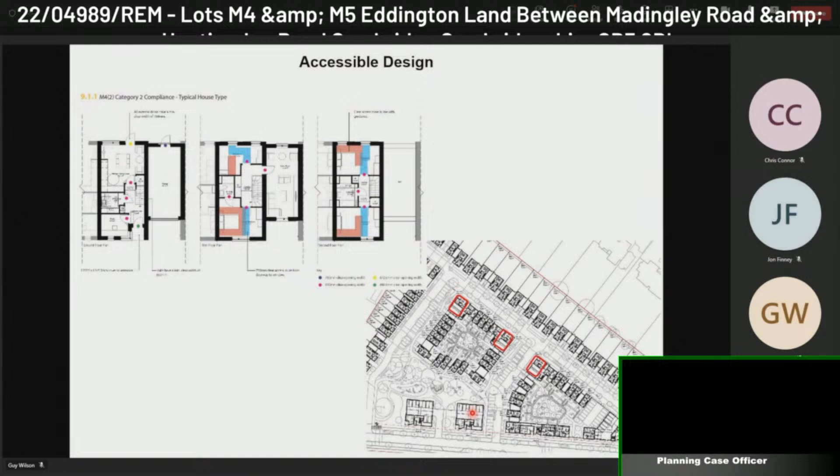As I mentioned earlier, in terms of trees and ecology, there's this existing copse area centrally within the site, which is proposed to be retained in a reduced form with a number of trees which are in good condition. There's also existing hedging and planting along the northern and western boundaries proposed to be retained, and the horse chestnut avenue along the eastern side, again proposed to be retained, other than where in the future the secondary street will continue through that avenue.

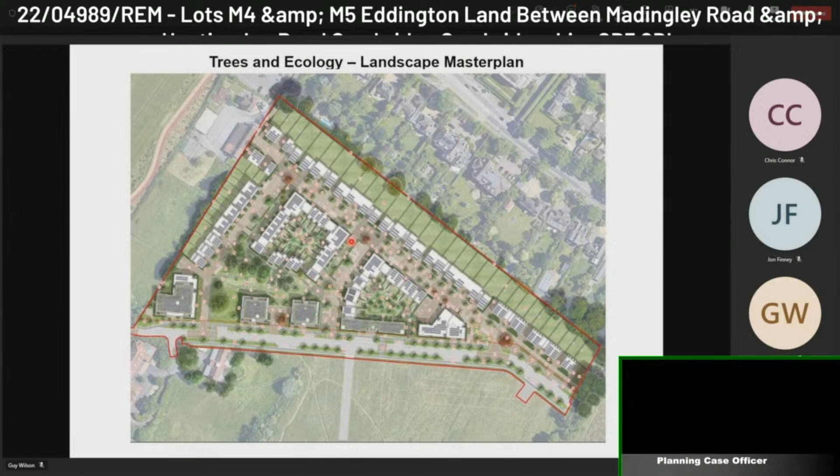Extensive tree planting is proposed to compensate for the loss of trees within the site. This includes hedgerow planting to supplement the existing hedgerow along the northeastern boundary, and extensive tree planting along the secondary street and the loop road, as well as within the courtyard gardens.

In terms of the drainage strategy, the site has been designed to be compliant with the site-wide drainage strategy. It includes a number of drainage features, including an attenuation basin, swales, rain gardens, permeable paving, and some underground attenuation crates.

One issue is that the site-wide drainage strategy will see water directed east of the site, and then loop round to around the site before joining into the wider site-wide network.

Because development to the east of the site hasn't come forward yet, a temporary pumping station is proposed in the southeast corner of the site until that future development is delivered, and the Lead Local Flood Authority is content with the design of that.